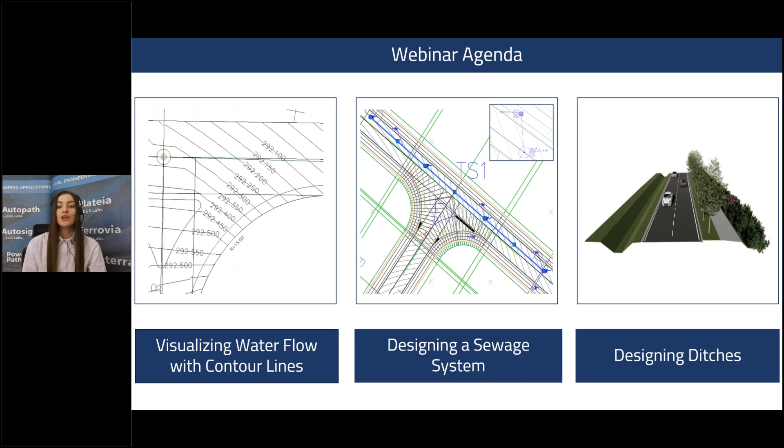So the first method involves initially drawing the ditch in the longitudinal profile and then transferring and adjusting it in cross sections. And the second method is to draw the ditch directly in the cross sections. We will also delve into labeling ditches in the profile table, then proper editing of ditches, and what we should pay attention to during the refresh process.

So for all of you who have registered for today's webinar, I have prepared a detailed PDF instruction for all three examples. You can find them in the GoToWebinar application under the Handouts tab, or if you are using a web version of the GoTo Stage webinar, you will find them under the Materials tab.

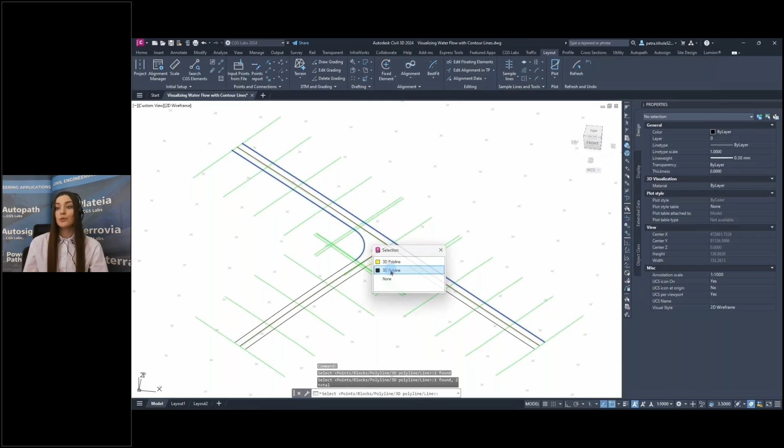Okay, so in the Layout tab, I run the Terrain command and define the terrain's name. After that, I will select points and break lines, and then I will click the plus button. So here I click the plus button and select all the 3D road edges of the road. And note that if the road has a centerline crown, it is necessary to select not only the edges, but also the center line. After that, I check the box for the contours and I click settings. Here I have some additional settings for interval, for major and minor contours.

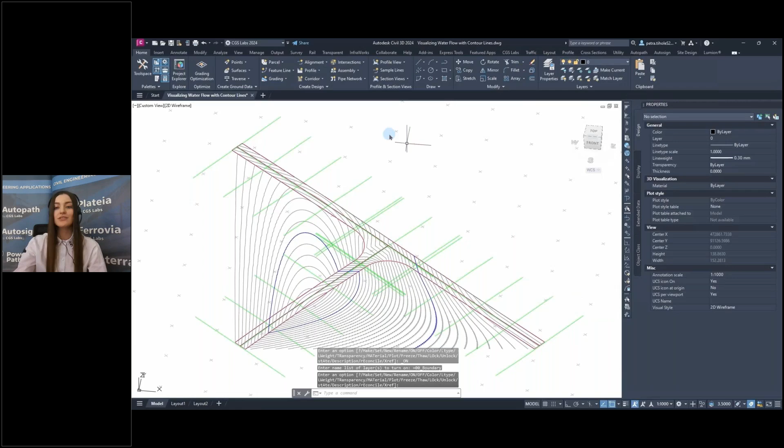Okay, so now we have the terrain, and if these lines outside the road bother us, we can also generate a boundary. In my case, I have already prepared the boundary, and it can be either a 2D or a 3D polyline. So I run the terrain command again, select the boundary in the drawing, and now you will see a new terrain. Okay, so now we only have the surface of the road. Now we have drawn contour lines on the road and we want to know which point is the lowest, so we will know where the water will flow.

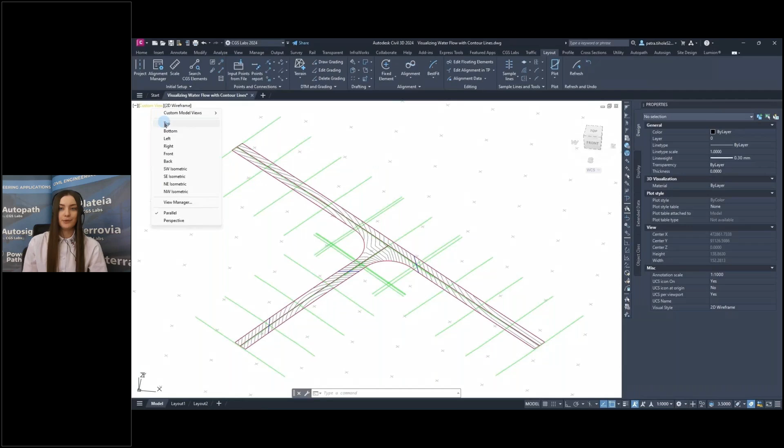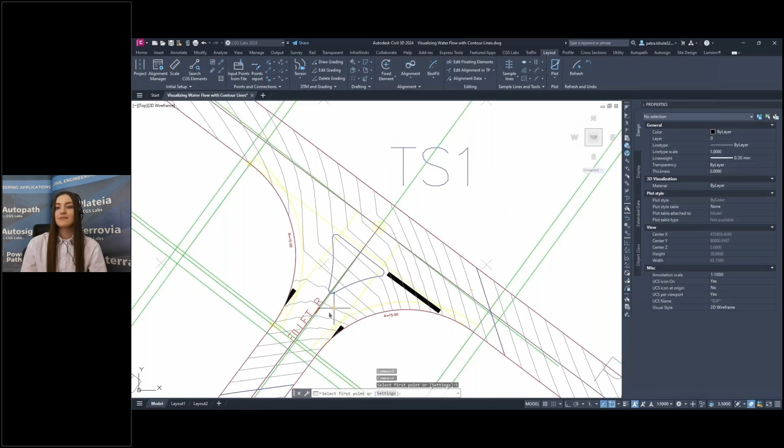We do this by first going to the top view and then clicking the command Label Contours. In the command line, you can read: select first point or settings. So I will first click on settings. It opens a dialog box where I select surface and define text height and number of decimal places. And now in the drawing, I specify the location of 2 points along which the elevation will be labeled. This line can also be moved and labels will adjust interactively. And you can now see where the lowest point of the road is and where the water will flow.

And in Plateia, there is also another command that draws contours between two 3D polylines and indicates the slope direction with an arrow. The command is called Interpolate Roadway Contours. After running this command, we select the first 3D polyline and then press enter if we want the contours to be drawn along the entire 3D polyline. Then I select another 3D polyline and press enter again.

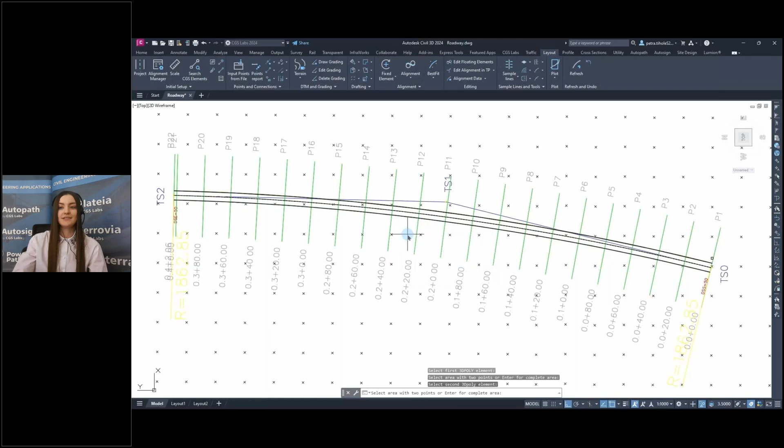And in the dialog box, I click settings and I check the box for the arrows option. Next I can specify the arrow interval and height and click OK. And if I zoom in, now you can see that the contours are drawn on the roadway. And you can also see the elevation data and the arrow that indicates the slope.

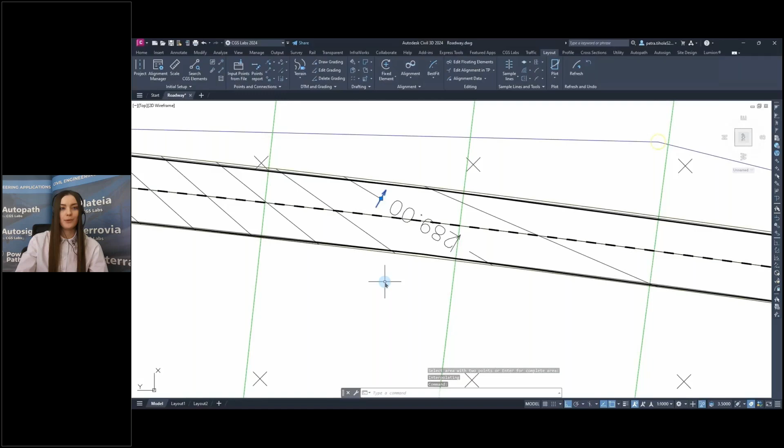So now let's move to the second topic of today's webinar, namely designing a sewage system. Plateia is a software solution designed for road planning and reconstruction, and it is not primarily designed for planning a sewer network. However, you can utilize all the potential of the program and define the sewer axis using various tools and methods. How I navigate and which approaches I employ depend on me as a designer and my preferred method. And in the PDF tutorials, you will find two procedures.

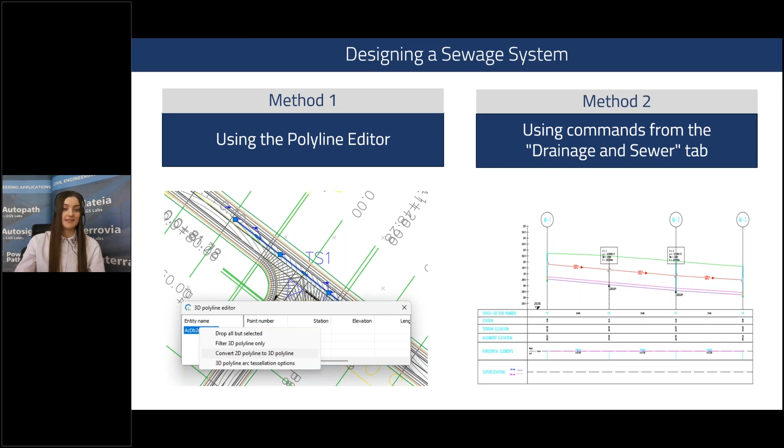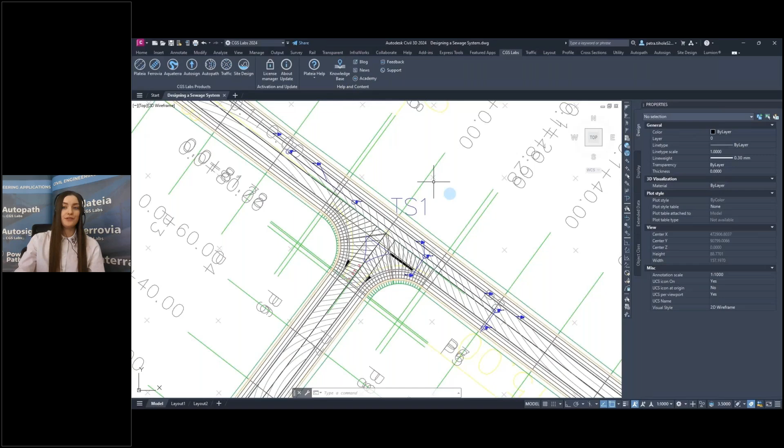The first one utilizes the polyline editor, while the second involves using commands from the Drainage and Sewer tab. We will go through the first method together today, as we will be using some tools that can also be very useful for other tasks. So at the beginning, I use basic CAD tools to draw the sewage system on the layout. This involves employing commands such as spline for drawing pipes and blocks for drawing manholes. All of these elements are drawn in 2D. And after I define all these elements, I can select those